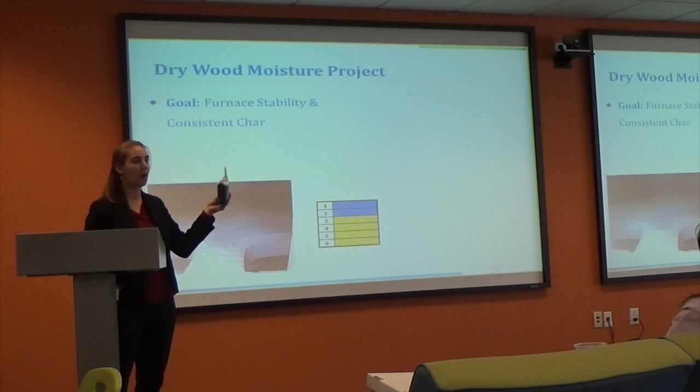In the furnace, we go through the first 2 hearths. Like I said, it's still wet coming in, so we want to evaporate off that water. That way we can go through in our last 4 hearths a chemical process called pyrolysis, where we're actually going to turn our wood into char. And so here's our char. Here's another wood sample.

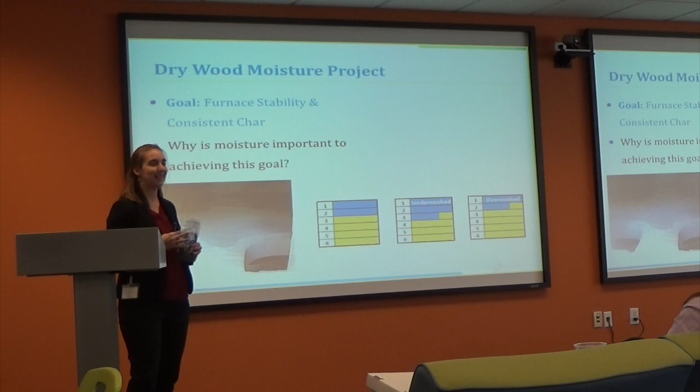Moisture is really important in this process because if our wood coming into the furnace is more wet than you anticipate, we're going to spend more time drying off this wood and less time in pyrolysis. That's not good because char is one of the raw ingredients that goes into the briquettes. If it didn't go all the way to char, it's going to be more woody, and we're going to have to spend more money putting starch into these briquettes to hold them together. So that's not good. And then if it's less wet coming in, we're going to have more time in pyrolysis, and we're actually going to overcook our char, and that's not good either because that's going to mess up our volatiles, like it was talked about earlier, and that's not good because our customers won't be as happy. So we don't want that either.

It's really hard to understand things as an intern. You're only there for 6 months, and there's a really big process. There's a lot going on, and I was really confused a lot of the time. So this guy, Chad DeWeese, would always draw me pictures. He would give me analogies so that I could understand better.

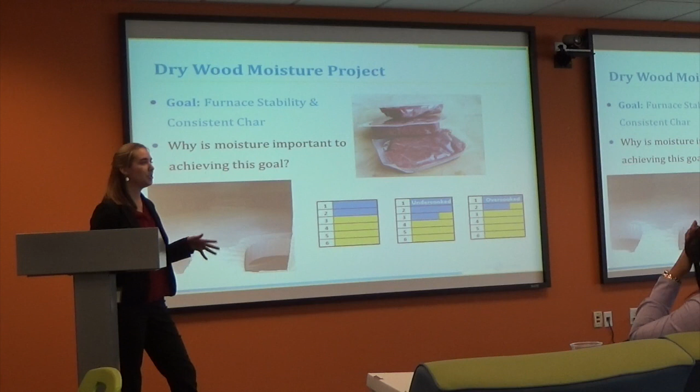My favorite one is if you have 3 pieces of meat, you put 1 in the freezer, 1 in the fridge, and 1 on the counter. Then you take all of them and put them on the grill for the same amount of time. Your piece of meat that was in the freezer is actually going to be undercooked. Your piece that was in the fridge is going to be just right, the perfect piece of meat, and the one that was on the counter is going to be overcooked. So what we want is that perfect cooked piece of meat, which is what we're trying to do with our char.

Our current method for understanding moisture is our operators will go and take a sample about 3 times per shift, that's every 4 hours, and they'll put them on these CompuTracks and it'll get them a moisture reading. Then they make changes to the process based on this moisture reading they got. Since they only do this every 4 hours, the changes they're making are really slow and not updated. And depending on the operators, it could be very variable. They could take samples differently, so that's not good.

So our new method is this microwave moisture technology. It's this Hydronix that can be installed right into the process, and it can take samples 25 times per second. So it's a lot faster, and our operators now have a way to have live information on how the moisture is changing and reacting. It's also very reliable as long as you install it properly. That's a really big thing my boss taught me: you want to make sure your equipment's installed properly, and then if it's calibrated correctly, it'll be very reliable.

In order to implement Hydronix, I had to learn a lot about signal processing. That is not something I've ever learned in school. So everything I knew about it came from my manager and watching YouTube videos, and a lot of trial and error. As you can see from this top picture, it's very bouncy and kind of hard to read. This could be due to a lot of things, like the screw flights getting in the way with the signal. This bottom picture here is a lot more clear and concise. It flows better, smoother, so you can really understand what your moisture is doing.

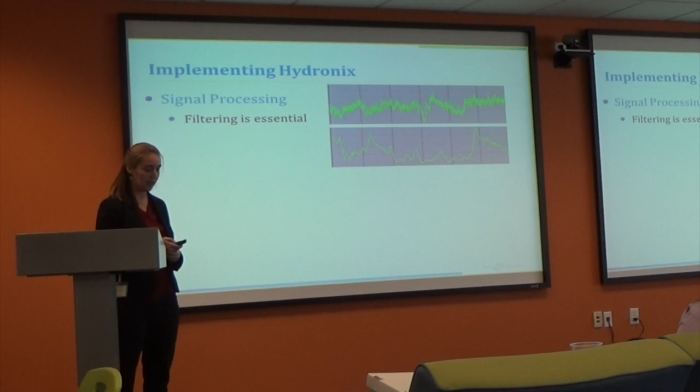Next I had to go through a calibration process. At first I started out doing a running method where I would take samples while we were actually running. It was hard for me to do because you have to get a high moisture reading and a low moisture reading in order to get a good calibration, and it was hard to know when we were going to get spikes in moisture. So I actually came up with a bucket method where I made my own moistures in 4 different buckets.

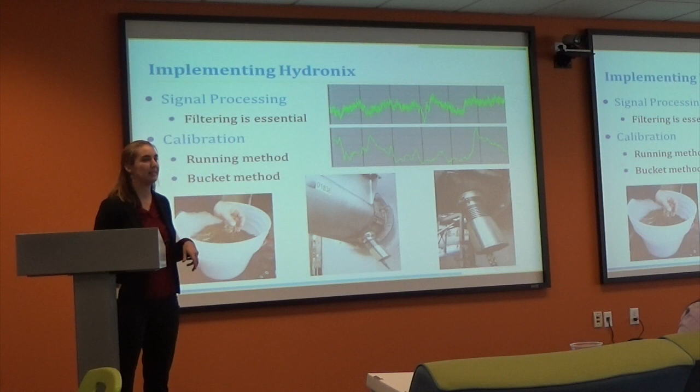On a down day, I was able to take the meter out and put it in the buckets and get my own calibration that way. And the results of this meter were really awesome.

The green line is our drywood moisture, and the blue line is the char weight coming out of the furnace. As you can see, the green line is able to predict the blue line, which means now we have a way to understand if the moisture will flatten out, and how much char we're going to be able to make. This will be better for our consistency. We don't want to overwhelm the process if you have an upset and a lot of char coming out.

Summer Shade is actually doing a pavilion pilot right now, where that's basically a high-level control, more complex PID loop, and that'll make it so that pavilion will be able to control this and make it straight so our operators won't actually have to make changes anymore. But this can still be a win without pavilion, because our operators can see the live information.

This is great because retort will no longer be our constraint. Currently, briquetting is always about how much char they're going to be able to send over, but now it's: can briquetting keep up with all the char we'll be able to make?

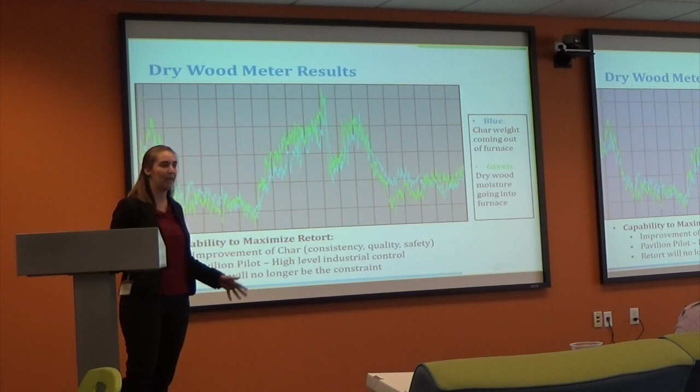This meter was very successful, so my boss and I decided to change the whole route of my internship to installing more meters.

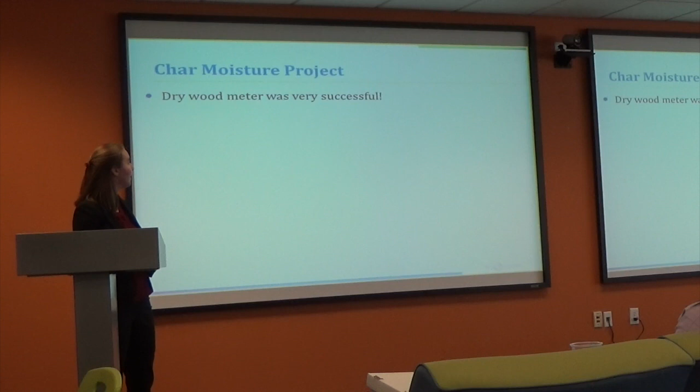The next one was a char moisture meter, and the goal for this one was to improve safety and also hopefully be able to predict volatiles and yield. This one was a lot easier for me.

I already knew what I was doing, and I was not going to make the same mistakes twice. I also didn't have to wait for a down day to calibrate this one, because I could ask our operators to change the amount of water going to our char. So I could do it a lot quicker.

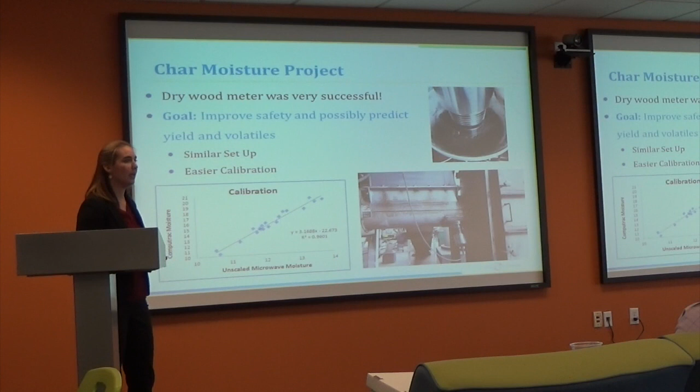The weight coming out of the furnace is measured using a char weigh belt, which is a very fragile piece of equipment. It costs $250,000 to install, and the maintenance fees are $30,000.

It was a pilot at Summer Shade, and it's a great way to understand how much char we're making. In a lot of places, you know how many bottles you're making, how many bags you're making, but with char it's just going into our briquetting process, so the weigh belt was a way for us to understand how much char we're making.

But the meter is only a $10,000 install, and if there's a break with the screws or something and it breaks the meter, we don't have to go through the whole installation process again—we just have to put in a meter.

The biggest thing I learned from the calibrations was that getting a good sampling method is vital to a good calibration, because you want to make sure you're getting the right data. For future validation, you don't want to think you're getting the right data when you're not, and you don't want to think your meter is wrong when it's really right, or think it's right when it's really wrong. Having a good sampling method going forward is key to this.

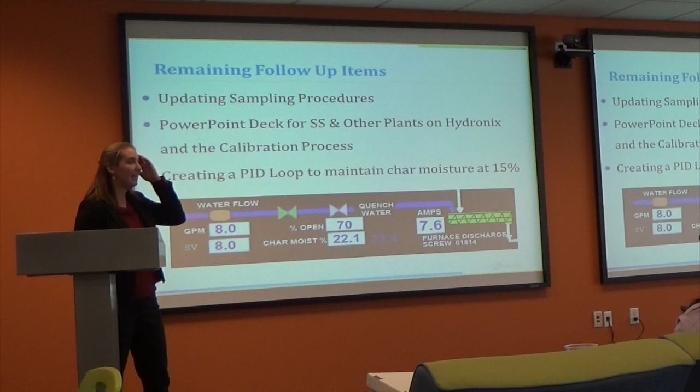As I said earlier, I have until January to finish up my internship. When I go back, I'm going to be updating sampling procedures so we have better information going forward, and a better plan for the sampling of the meters. Then I'm going to come up with a PowerPoint deck for the Hydronix meter and calibration process.

So that when I leave, my plant and the other plants will be able to install these properly. And then creating a PID loop to maintain our char moisture at 15%. At 12% you get into the fire hazard and scary zones, so we want to make sure our moisture stays at 15% with our char - that's what the PID loop will help with.

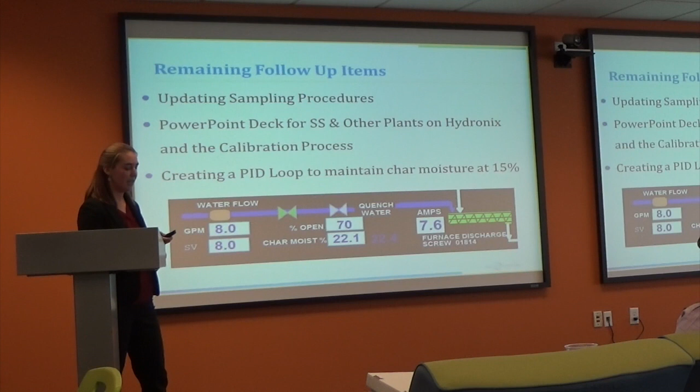During my time at Clorox, I was able to really relate to the calls to action - if not every week, then every couple weeks - and they really matched up with my internship takeaways. So, putting the consumer first: this is actually my second internship, and throughout school I never learned how the consumer is important in making these products. Every change we make is going to affect the final briquette.

So we want to make sure we're thinking about the consumer with our changes to the process. And then, theory in school can't always be applied in real life - real life is a lot messier, and I had to learn that with changing to the bucket method and everything. So just embracing change and not being afraid to change your method right away if it's messing up.

And then, ask a lot of questions - I probably asked a million questions, that's probably an understatement because there's just so much going on in a plant. So just make sure you communicate when you don't understand. There's nothing worse than someone asking you to do a project, you do the work, and find out they really wanted you to do something else. So making sure you don't waste time that way.

And don't be afraid to dig - that's something my boss told me weekly. He wanted me to remember that he didn't want me to think everything they were already doing at the plant was the best it could be or the best method. He wanted me to dig into things like the sampling methods, for example, and find ways to improve the process.

And then, Jordan's meters - this is something I heard all the time. Everyone would say, how are Jordan's meters doing? And of course they're not my meters, they're Clorox's meters, but I really felt a sense of ownership with these meters. I wanted them to be the best they could be. When I leave, that's going to be the legacy I leave with that plant, so I don't want them to have a hard time understanding the calibration procedures or anything. I want it to be a win at the plant and other plants.